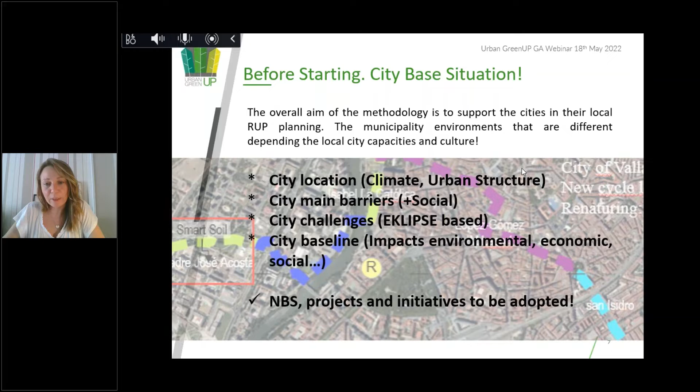And once you cross that base preparation phase, you start engaging and co-creating. So at that level, the key aspect is identification and involvement of stakeholders: your local authorities, politicians, technical experts, business, academia, citizens, or any other relevant party at your local level that has to be considered.

You prepare for co-delivery, so you are defining the plan on co-creation, involvement, development, and implementation. Also looking at that financial phase, how to finance those processes, because you have to consult, involve, collaborate, but also never forget you have to empower those key experts behind your local RUP plans to help and support you in each process.

You have to explore your city targets. Once you have understood your city's particular needs, you define the city targets and you define the particular city scenario for implementation of that nature-based solution. At that level, you also have to prepare the local municipality space for integration of that plan, so you have to wonder about specific legal aspects that you have to take into account, which differ between cities but are key in deciding how successful that process will be at the end.

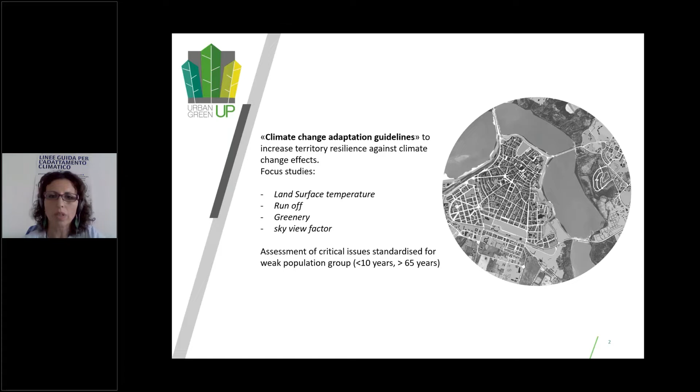We started since 2016-17 with a deep analysis of environmental and climate change aspects of the territory. And in 2018, we adopted climate change adaptation guidelines. This is important because here we recognized some of the climate change resilience challenges for Mantova that you can see in this slide.

These challenges are green areas, urban heat islands linked to the UNESCO heritage site of Mantova city center, the water management system and land use, mitigation of periods of drought in the Pianura Padana basin, biodiversity issues with insects, and the presence of different contaminated sites in the area.

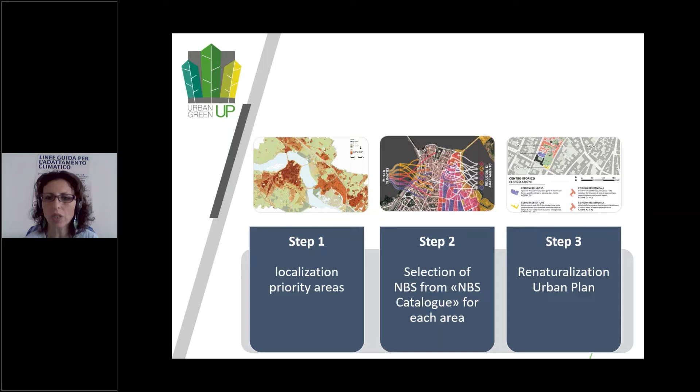We started with the localization of the priority areas of the city, which you can see in step 1. Then for each area, we selected some NBSs from the NBS catalog of the Urban GreenUp project. The third step was the definition of the Renaturalization Urban Plan. Here is an index of the document, and then you can see the plan of the RUP.

In this slide, you can see also some points where we identified these NBS, in the city center and all across the territory of Mantova. It's important to say that many of these actions, selected with the RUP and the Urban GreenUp project, were financed and are now financed by other European projects and national or regional projects, which you can see mentioned in this slide.

The main focus we are working on is the adaptation theme, with actions of urban and peri-urban forestation, actions about depavement and introduction of NBS in the city center. We are promoting biodiversity, mobility, and urban regeneration; in all the urban regeneration projects of the center there are actions on reforestation and NBS aspects.

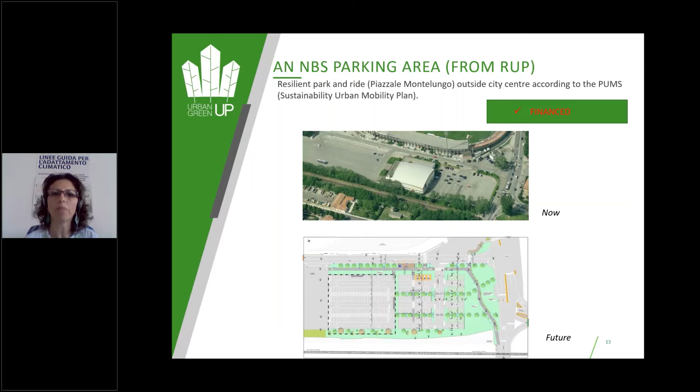This is a requalification project in one of the main squares of Mantova, where you can see trees inside the square, and there are two or three parking areas, new parking areas with NBS. The last one I want to show you is Palazzo Tè Gardens, a requalification green project in the city center of Mantova, financed by the Italian Cultural Ministry, and this project will end at the end of next year.

Some suggestions for cities that want to approach the renaturalization urban plan: first of all, act in synergy with the other departments of the institution, as Maddalena told before, and also act and co-create with all the stakeholders of the area to increase awareness on this theme. Thank you very much from Mantova.

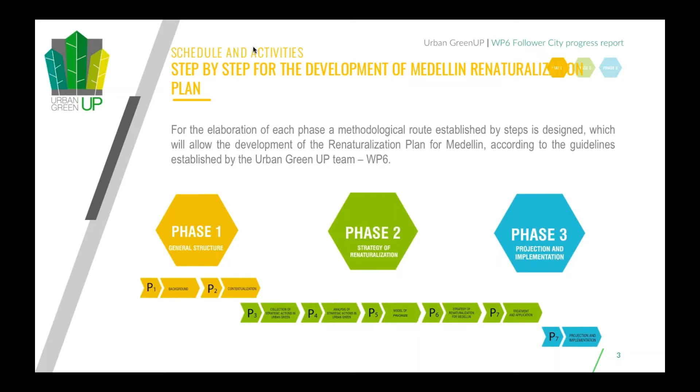These slides and the next show phase 3 and how Medellín's RUP is developed, made up of 5 components, according to the steps established by the Urban GreenUP project explained by Maddalena previously. An infographic is made to show in parallel how Medellín is evidencing the fulfillment of each point of each component, which were the activities and associated items that need to be developed to obtain the desired result. Next, please.

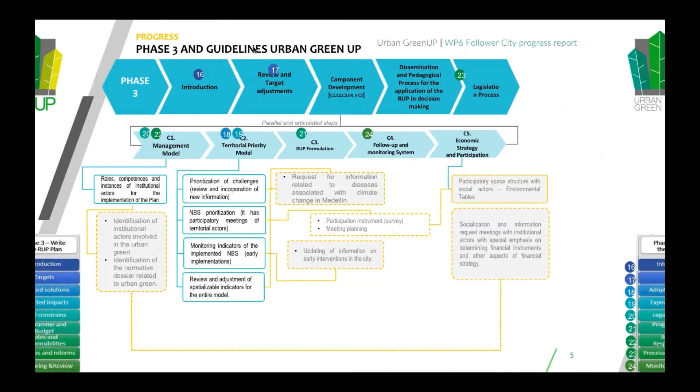The other, please. At this point is the final result. This is the progress of the formulation of the RUP. Next, please.

The plan for Medellín has 5 components. The first is part of the co-participation strategy, with 4 groups of actors: academia, citizens, and the public and private sectors. A second component corresponds to an institutional management model, where 58 actors related to green were identified and classified by importance according to their function, roles, and competences with the mayor's office. The third component is part of the financial strategy, generating operational channels to generate, preserve, and maintain the urban and rural green areas of Medellín. A fourth component refers to a model of territorial prioritization to materialize the NBS, and the last corresponds to the monitoring and follow-up system for NBS. Next, please.

At this point, we are going to start implementing the renaturalization plan through the so-called early intervention in the urban green that Medellín is already developing. Next, please.

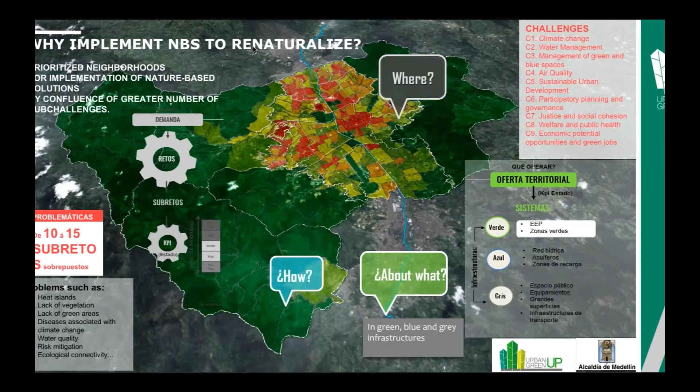Why implement NBS to renaturalize? From the territorial prioritization model associated with component 4 of the renaturalization plan, it is defined to validate the territorial offer that Medellín has through its green, blue, and gray infrastructure, spatializing the 9 city challenges and defining its most critical areas to intervene through NBS in the current city project of the development plan. Next, please.

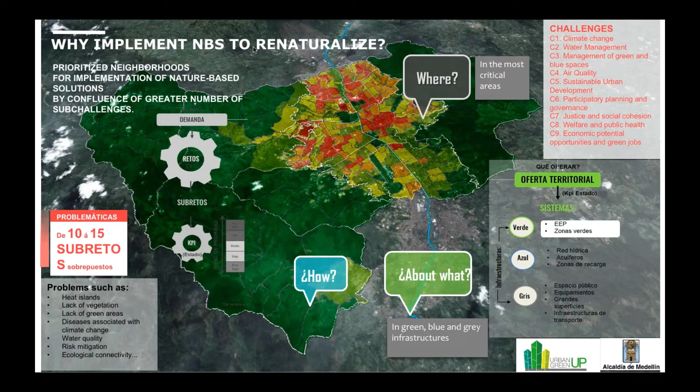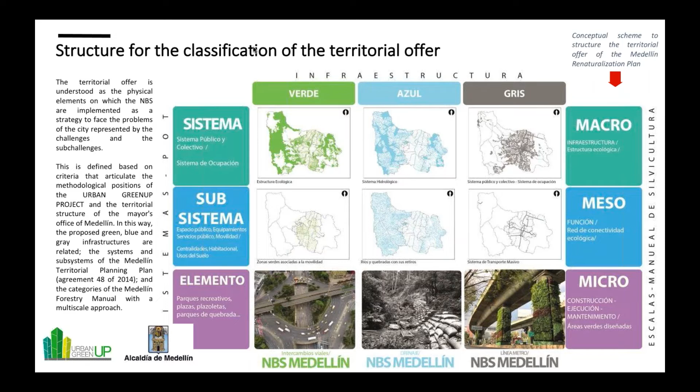In the multi-scale planning processes established by the Urban Forestry Manual, guidelines are established to address the macro and micro scales. At the micro scale, it is defined to develop and implement nature-based solutions. Medellín's renaturalization plan incorporates these guidelines, specifically in the design of public space through NBS, improving its landscapes and ecological condition, and highlighting the associated co-benefits. Next, please.

According to the NBS catalog delivered through the Urban GreenUP project, Medellín groups the 47 types of NBS into 12 categories, according to the type of green, blue, and gray infrastructure. The category corresponding to carbon capture or tree planting is unified, highlighting the types of NBS already being implemented in different projects, such as orchards, green walls, green facades, tree planting, green corridors, pollinator gardens, cyclo routes, and permeable pavement. Next, please.

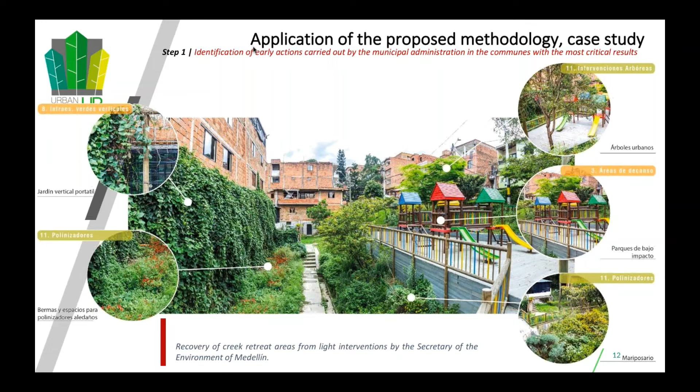The case studies correspond to the identification of early intervention, where different typologies of NBS solutions are being implemented in the communes with the most critical results in the retreat areas of the stream. Here you see 5 typologies: portable vertical gardens, berms and spaces for nearby pollinators, arboreal intervention, and rest areas such as low-impact parks and butterfly gardens. Next, please.

In the last image, the different spaces improved through the intervention of different types of solutions are visualized. There are residual spaces and garbage dumps in areas of withdrawal of the creek. Next, please.

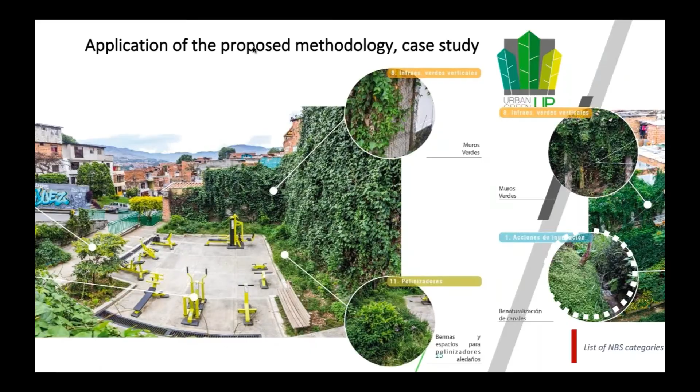This is a check carried out of what must be taken into account in the project, as part of the development plans and how it's articulated with the renaturalization plan, in the conception phase, the design and co-creation phase, and the implementation and monitoring phase. This is a first approximation of how we should incorporate NBS in city projects according to the current Medellín Futuro development plan.

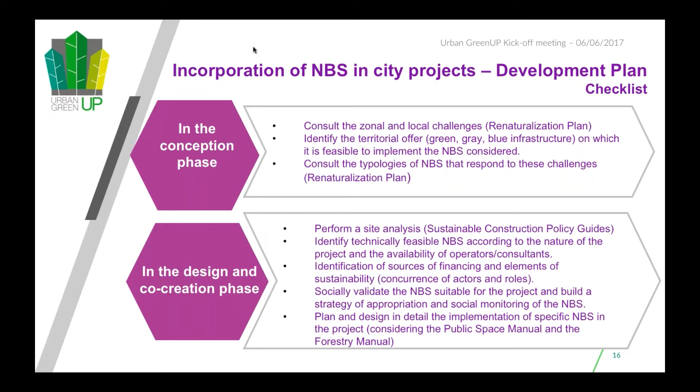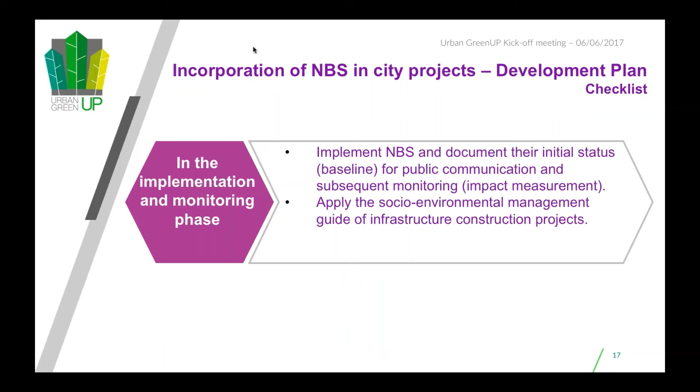Next. This is the last one. Thank you very much.

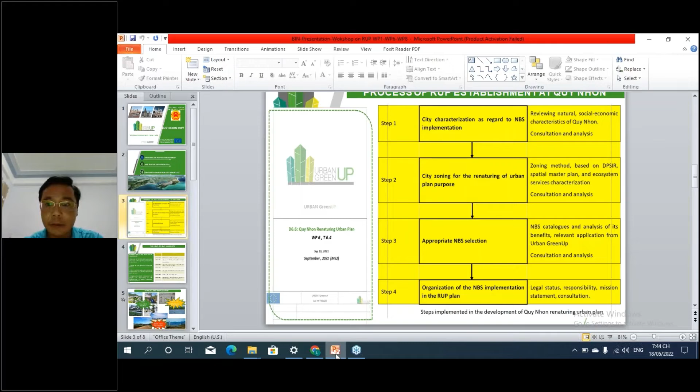Just one second. Can we show the slides? In principle, now you can share your screen, you should see the button. Yes, exactly, I see your screen now. I don't see the presentation, but I see your screen. Hello everyone, today I'm very happy to present. Now show it. Okay, good. Now we see your presentation, you can start. Oh, all right, thank you.

I'm very happy to show my presentation on the RUP establishment in Quy Nhon city, and we have 3 main parts of the presentation. The first is the process of RUP establishment, the second is some information about Quy Nhon city's RUP, and the last is the necessity of the RUP in Quy Nhon city.

Here is the process of RUP establishment in Quy Nhon city. Based on the methodology from work package 1, Quy Nhon city identified 4 steps to make the RUP. Step 1 is to characterize the city with regard to NBS implementation. In this step, we reviewed the social, economic, and environmental characteristics and other conditions in Quy Nhon city. In step 2, we try to zone the city for the renaturing urban plan purpose, based on the spatial master plan and ecosystem service characteristics.

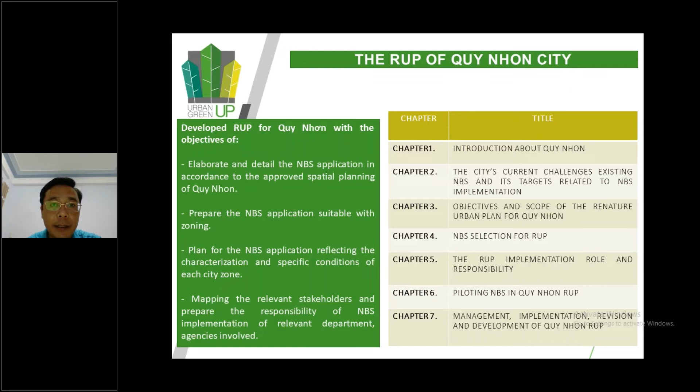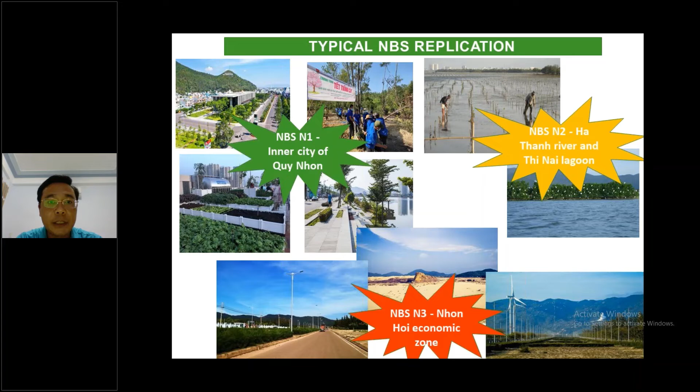After having the RUP, we also think the RUP is very important for Quy Nhon city, for several reasons. The first is that at the moment in my city there are too many plans - for example, the environmental protection plan, the climate change adaptation plan, the green system plan - and I think the RUP will combine all of them into one big plan to renature Quy Nhon city.

The second reason is the RUP is the basis for my city to make appropriate management decisions and investments in NBS solutions in the future. The RUP will help my city improve environmental quality and adapt to climate change. And I think the last reason is the RUP gives Quy Nhon city the opportunity to attract foreign support to improve the city environment.

And the last one, I think that the RUP might be the first step, and the long journey to transfer from the RUP to reality. But I think if we have the good RUP, we will have the good implementation in the future. Thank you very much from Quy Nhon City.